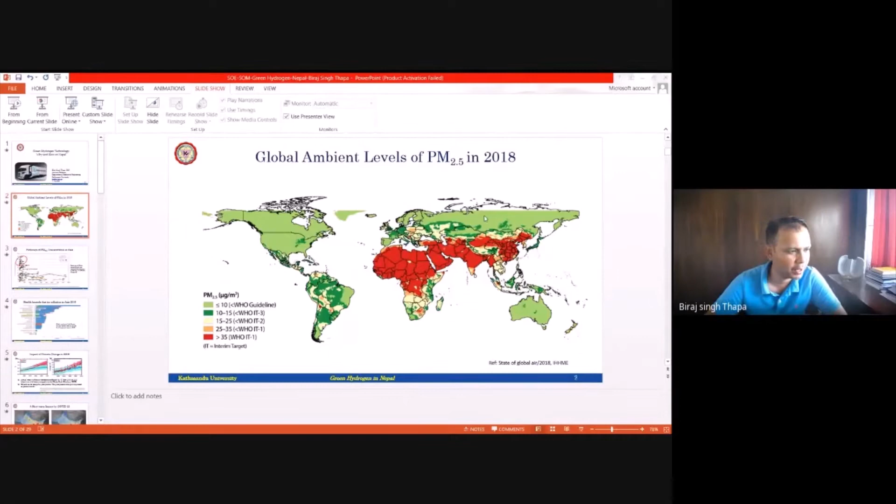So that's what we want to dream: to have fresh air, clean air. If not for us, the generation behind us—they should have green everywhere. That's why we see hydrogen as a future energy source, where we can see the entire globe green in this picture. That's a dream of my generation, to have everything in this picture green. That's why we call green hydrogen one of the sources.

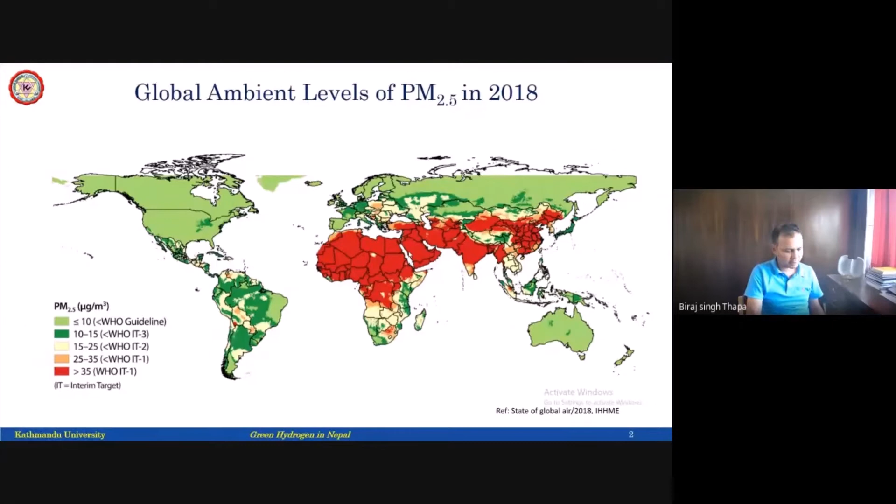And why we are having it like that—this is the background. Because today's discussion, the main aim for us is to have motivation. We need to understand some background, if not the technical one, at least the social part of it.

If you look at the picture, the GDP per person we have in Asia—Singapore, Brunei, Australia—they have quite a high GDP compared to South Asian countries: Bangladesh, Nepal, India, Pakistan. We are neighbors, good neighbors, and so many things are common. We have very low GDP, and we have very high particulate emissions.

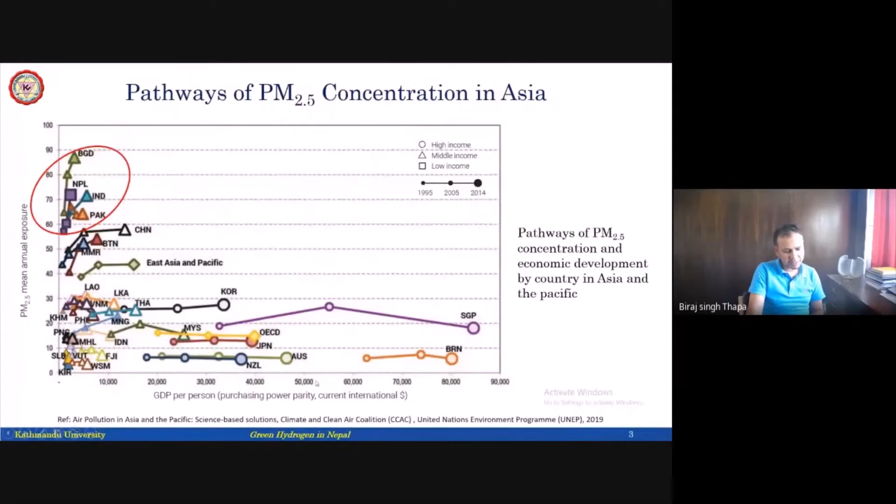So that is a really big challenge for our part of the world, and producing bad energy. We produce quite high emissions compared to the bigger or developed countries, and that is the reason we need to change the way we use energy, so that our GDP can rise and our emissions can fall down.

If you see the trends of global warming from the studies done, we may expect almost a 6-degree rise in temperature in the Himalayan region. If a 6-degree temperature rise happens in the Himalayas, we will not have a single drop of snow on our caps, and that will stop all our rivers flowing, and that will stop our entire ecosystem.

Of course, it will not happen—there has been a lot of movements, a lot of political science and other initiatives that will not let this happen. But still, if nothing is done, there will be a 6-degree rise in temperature, just because of greenhouse gases and other effects that human beings are producing, particularly through the use of fossil fuels.

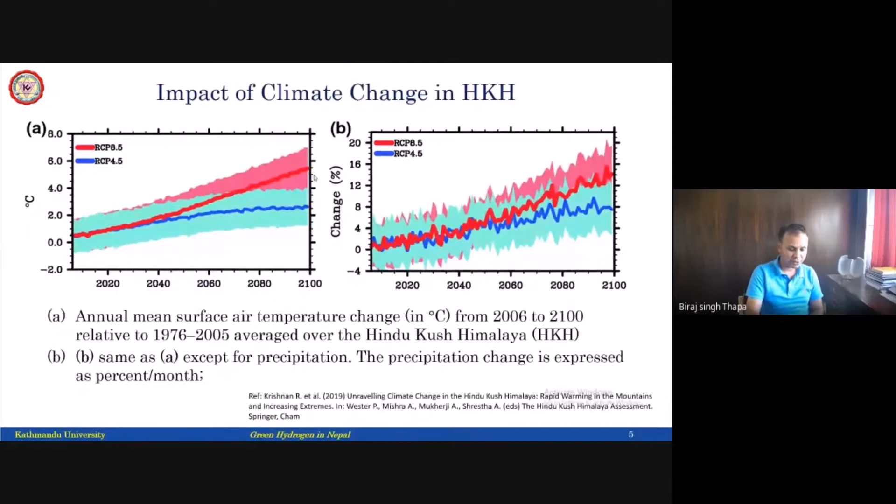But we have some scenarios—this is a very short-term study done by NASA. If you look from March to April into 2019, exactly the same period, this is the emission levels, the molecular matter above the Indian subcontinent. And if you look, just because of COVID, none of the vehicles were out. We can see within the same period, within one month's time, it has significantly declined.

Of course, we see some pockets because we have coal-fired electricity generating plants in this area, so that is still producing electricity. But if you see Delhi, if you see Dhaka, if you see Lahore, everything is close towards blue or green. That means if you can control greenhouse gas emissions, if you can control particulate emissions, that will certainly improve the environment. And COVID has given a very strong background—a very strong correlation between things.

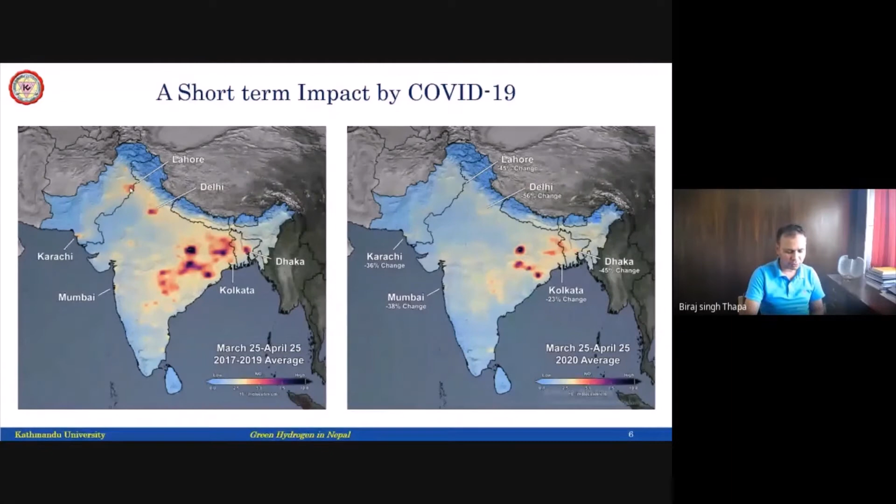So then, on that background, so many clean air measures in Asia have been proposed, released from UNEP, the United Nations Environment Program, for us. And if you see, these are the recommendations to clean our air, to control our environment. And there are so many things.

Clean cooking, of course Nepal is working on that. Industrial processes—most of the emissions are from post-combustion controls, for example the brick chimneys and other combustion things. And particularly if you see the emission standards for road vehicles, that means if we control the emissions coming from road vehicles, that will have a very, very high impact.

And that is possible. In Nepal, as of now, we can count the number of electric vehicles, that is 5 or 10, less than 50 on the roads. So if we change these patterns, the way we use the road vehicles and produce emissions, that could have a very big impact on the environment, and of course reflects on climate change and other things.

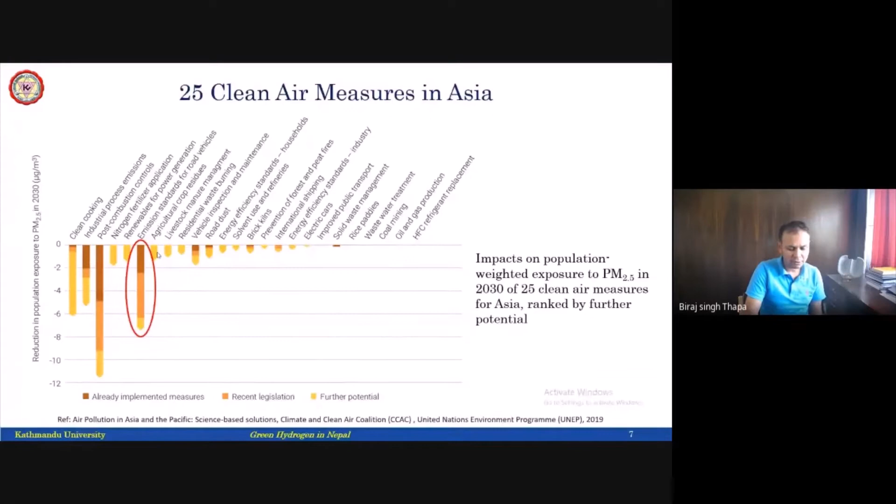Studies have shown, if we follow clean environmental measures, under the current scenario the policies that countries are following in this region will produce certain emission patterns by 2030. But if clean environment measures are legislated, the difference is quite high. The study shows 80% of emissions can be controlled, and most of them come from electricity produced from coal firing plants and emissions from road vehicles.

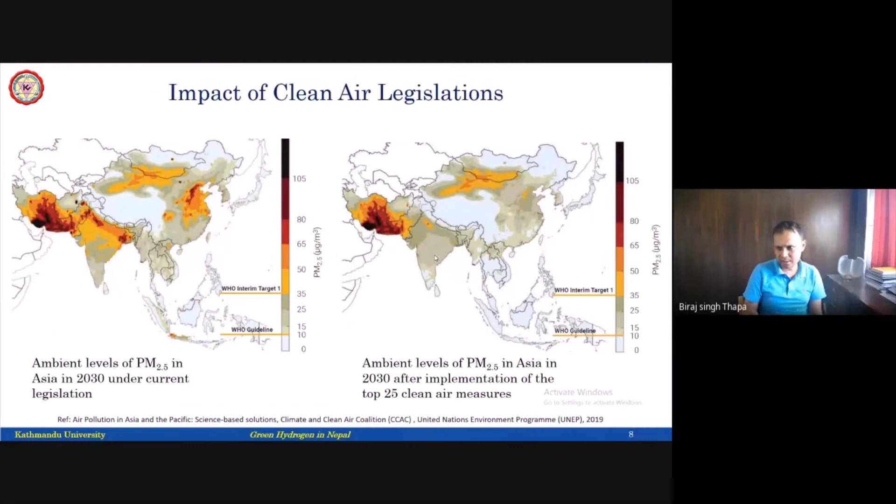So that has given us a kind of motivation that we need to change the ways we use energy. We need to change the way we use fossil fuels.

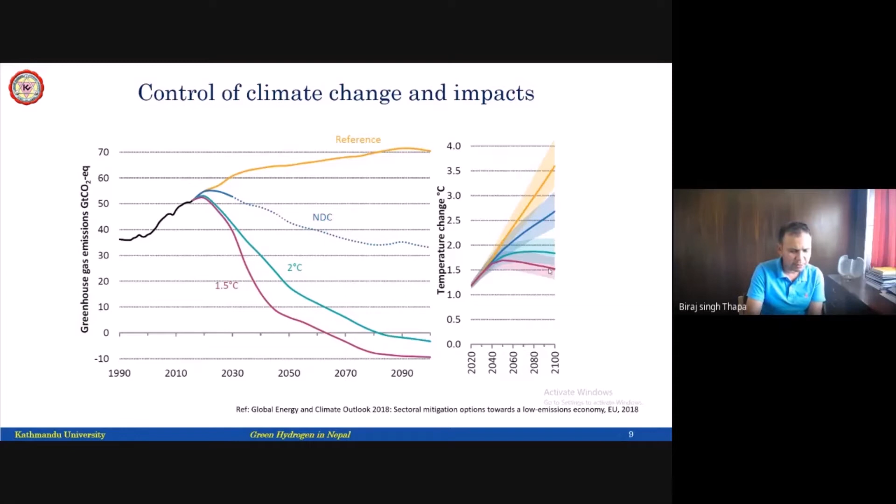There are also pathways to keep global warming below 1.5 degrees Celsius. And all these patterns of climate change, or control over climate change, have been related to the energy patterns that we use. So many studies have been done.

It is needed. It is necessary. It forecasts that if COVID does not impact it, the GDP is expected to rise quite sharply. And that means the purchasing capacity of each human being will increase. That means the amount of money we can use for purchasing energy could be higher than what we use right now. And that additional money for purchasing high quality energy for protecting the environment is possible because GDP is rising up.

If you can buy high value clothes, we can buy high value fuels as well. And there have been studies to see how this can be achieved. If we want to control temperatures below 2 degrees Celsius by 2100, this would be the energy mix. It's clear.

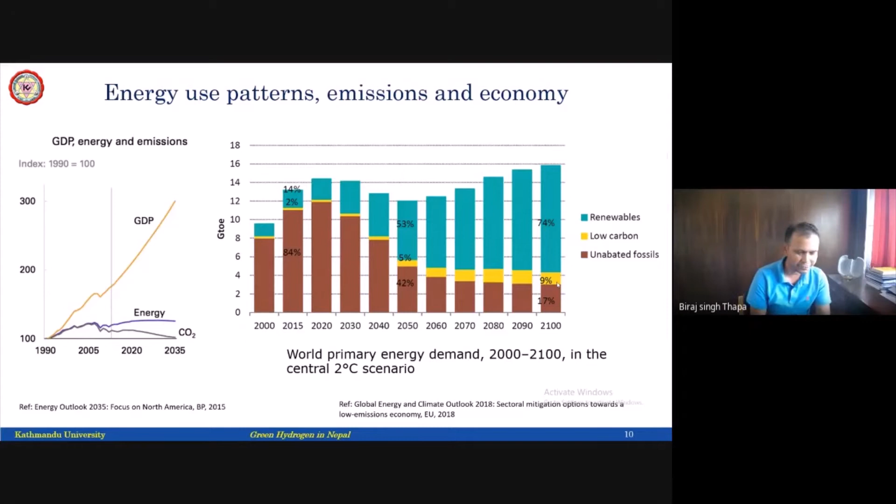And that's why we say green hydrogen can take up a big share of these renewables. So let me enter the second part: where do we find green hydrogen, and how is it contributing towards a low carbon society?

Hydrogen is an energy carrier. In fact, this process was found by the William Grove in 1838. It's quite an old technology. It's not rocket science at all. It's a very, very old and forgotten technology.

What we do is we just break water into hydrogen and oxygen ions by applying electricity. That's half of the reaction, what we call electrolysis. And we carry the hydrogen and put it back into the fuel cell, where it mixes with oxygen and produces water back. So it's just like breaking water into hydrogen and producing water by combining with oxygen.

So breaking water needs electricity, and producing water will produce electricity. So hydrogen is basically storing electrical energy in quite a dense form. This is just a chemical reaction. It's all behind the chemical reaction.

But the challenges are, how do we produce it in an efficient way? How do we store it in an efficient way? That has been our recent challenge, but it's an old technology.

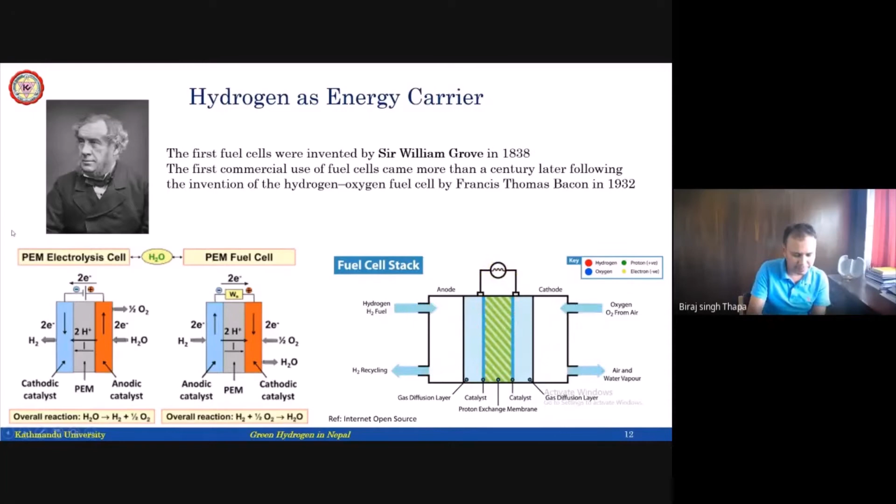As of now, it's of course solar energy that produces hydrogen. It can be directly produced from heat by thermolysis of hydrogen, and mostly from mechanical energy by heat, or directly from fluid energy by hydraulic machines. We produce electricity, and electricity can be produced from solar panels, and we do electrolysis.

We can produce hydrogen. Hydrogen can be produced from biomass, then by pyrolysis and other methods, and hydrogen can be produced. It can also be produced from photolysis, and there are several pathways. I think for Nepal, hydrogen production through electricity, maybe from solar or from hydropower, can be a sustainable path.

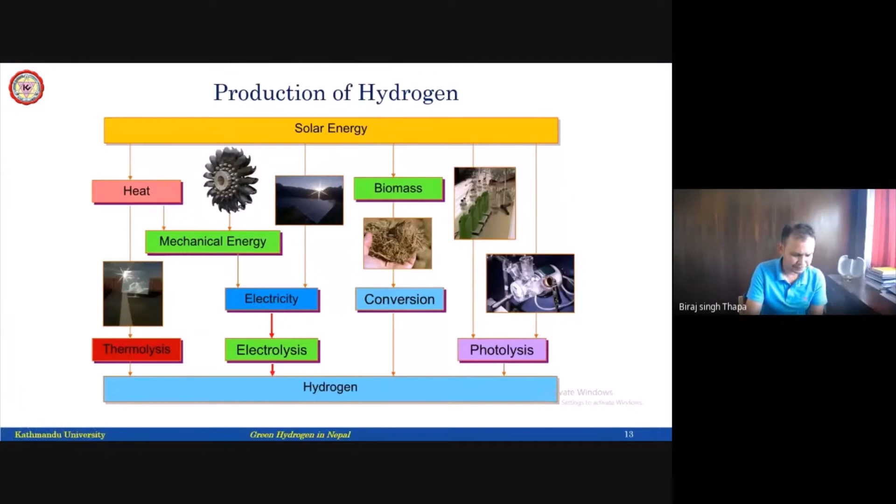There are a lot of technical aspects, though it has been developed a long time ago. This is a kind of block diagram. I don't want to bring you into the technical aspects, but there are so many steps.

We need to produce electricity first. Then we need to break water into hydrogen and oxygen. We need to store it, transfer it, and put it back again into the fuel cells to produce electricity again. So that's a very complicated process, which has overall efficiency issues.

The total average efficiency for the whole cycle is not more than 60%. There is so much research being conducted, and the aim is to cross 80% efficiency. But the argument is, if fossil fuel can run with 30% efficiency, why can't hydrogen run with 60% efficiency?

Storage is another problem. We need 300 bars, an extremely high pressure, not a common pressure. So that's a challenge, how to store it at that high pressure. It's very light, it leaks, it is inflammable. We have safety issues, a lot of cost parameters around it, and the technology is not completely mature. It's under process, and the main problem is adaptability.

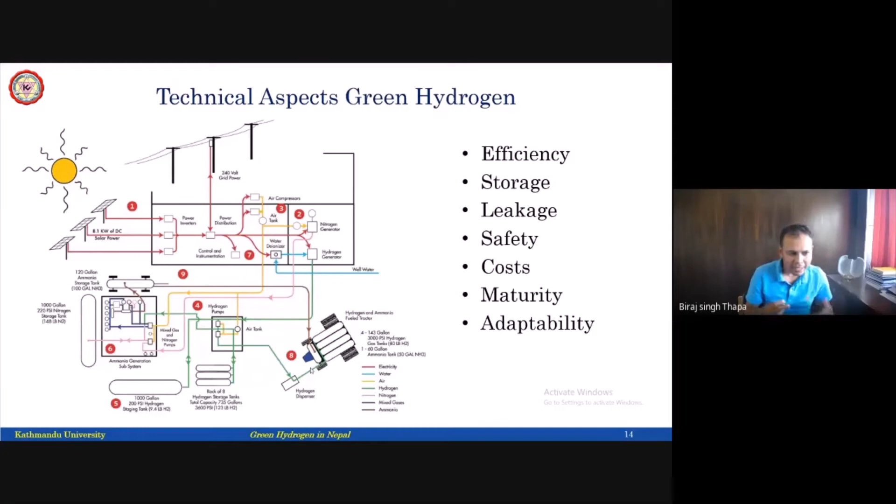Can we change our mindset from fossil fuels, which we call dirty but easy fuel, to a clean, complicated, and challenging fuel? Maybe that's how the maturity of society and the adaptability of this technology come hand in hand in future. That's what we can expect.

That's huge when we compare it to vehicles, because carrying a battery means consuming more power. That's why we think in the future, small cars and vehicles will still be battery-based electric vehicles. But for big buses, intercity cars, and trains, where the battery cannot drive it because of the low energy density, there is a distinct gap where hydrogen can fuel it because of this high energy density.

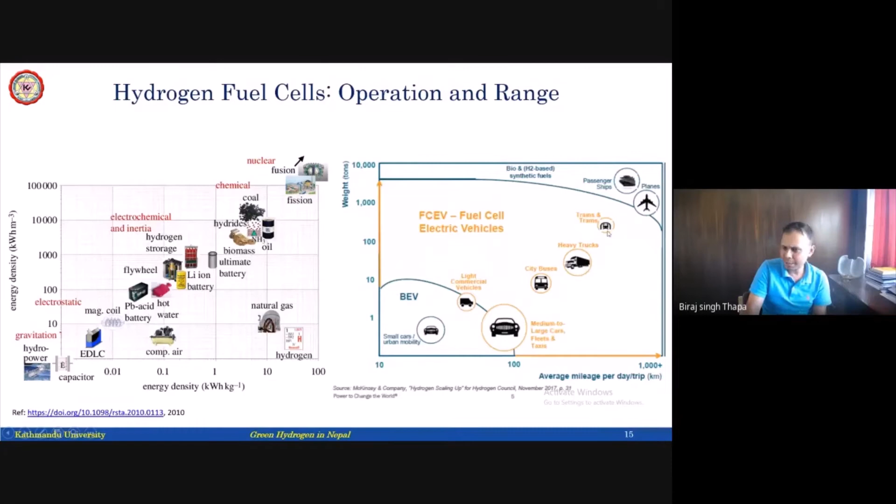We just need a few kilograms, 10 or 20 kilograms of hydrogen, to drive from Kathmandu to, for example, Pokhara. That's quite high energy density. So that is the range where lots of research has been conducted, and that is where we can also focus in Nepal. A lot of energy is consumed by city buses, trucks, and maybe in the future, trains as well. If you see the market right now in 2020, we have a very classical market for hydrogen.

It's just a feedstock. That means industries producing fertilizers, industries producing some chemicals, something only that. So only small scale or industrial scale hydrogen is in demand for this, but it is changing. Lots of new industrial sectors are coming up.

For example, power generation. Transportation will be the largest consumer of hydrogen. Right now it's almost zero, but in the future, transportation will have a very big sector of hydrogen. We also have industrial energy coming from hydrogen, and building energy coming from hydrogen. Almost the industrial scale, that is urea production and chemical processing plants, remains the same.

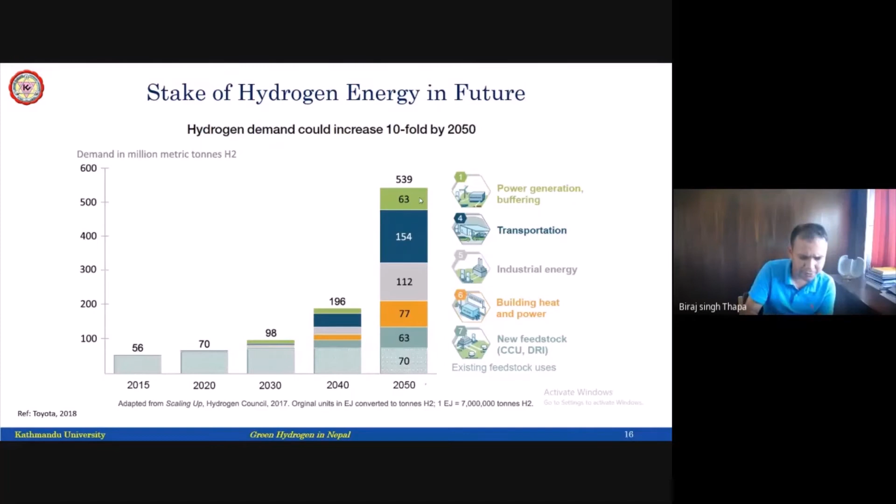So a lot of new things will happen. And if we start to bring hydrogen into the context of Nepal as well, all these things will start in Nepal too. We will have a new ecosystem of transportation, a new ecosystem for power generation and buffering. So that's the future. The entire world is moving towards hydrogen with a different shift of society.

And this year is very significant for hydrogen. We call 2020 the horizon, because from this year, the cost of hydrogen from renewables is entering the cost range of hydrogen produced from fossil fuels. Until now, the cheapest hydrogen produced from renewable energy was still more expensive than hydrogen from fossil fuels.

From 2020 and 21, the cost will start to come down and slowly even fall further. By year 2040, hydrogen produced from renewable energy will be cheaper than fossil fuels. And that is why we need a 10 or 20 year gap.

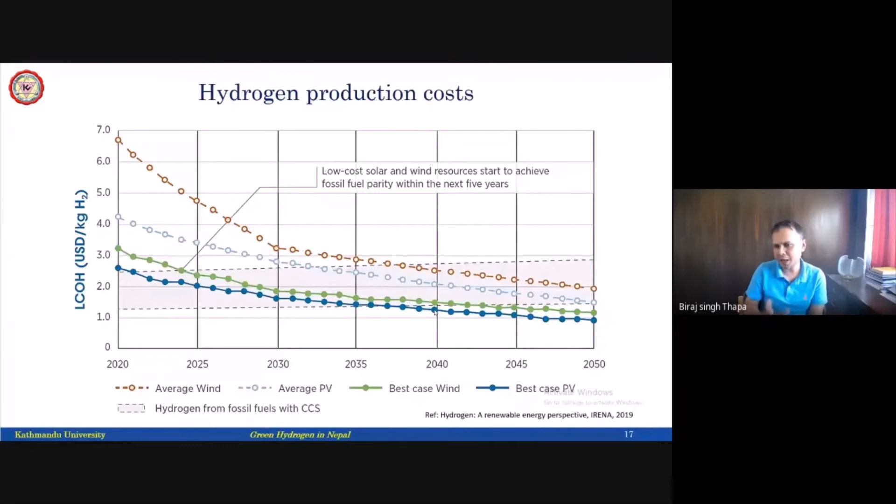We still have some time to prepare our society, because hydropower will remain for the next 200 years, for example. So if hydrogen becomes comparable and cheaper than fossil fuels, this will definitely change the transportation sector and the industrial sector. We need to start preparing now in order to adopt this energy in future. That's why we say this is the right time to discuss, the right time to start.

If you look at the development of hydropower in Nepal, the story has changed within the last 5 years, where we used to have 18 years of load shedding. Now we have surplus energy, and moreover 24,000 megawatts are under some stages of development, and almost 7,000 megawatts are in the pipeline. We expect these projects to be completed by 2030, if late 2035.

So if the National Grid has more than 7,000 megawatts in 2030, we will have lots of energy surplus. There are many discussions on how to handle the surplus energy, but it's good that we have it. That is the motivation.

The recent data from the Investment Board shows that by the year 2030, the maximum power demand, including all the new energy sources, converting all households into electric cooking systems, converting 30% of vehicles into electric vehicles, and all government measures to create demand, will saturate only 10,000 megawatts. But the power production, if we go in high-speed mode, will be 18 gigawatts.

So we can clearly see the projections. These studies show we will be having 8 gigawatts of surplus energy by the year 2030 than what we need, and that's what we want to utilize. It will be too late if you start thinking to utilize this energy in 2028, for example. We need to start thinking from now how to do that.

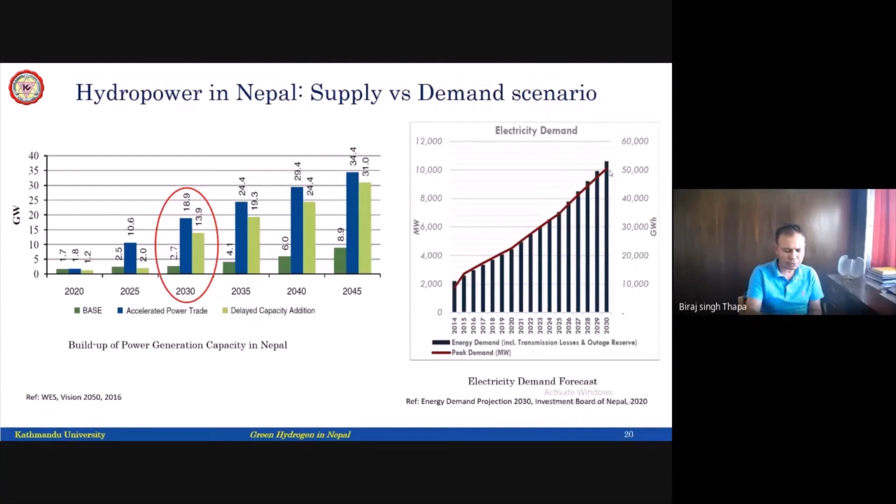And of course, the best example given is to export. There are so many things—MCC is in the parliament, and there are good numbers. It says we can have 3 billion USD per year in 2030 if we are able to sell all the surplus electricity to India, for example.

But there are so many issues. What happens if transmission lines are not there? What happens if you don't have quality and reliability in power? What happens when the transmission lines fail? What happens if political issues rise up? What happens when the money to do land acquisitions is not available? So many uncertainties, but still hope is there that Nepal can export electricity, surplus power, and produce revenues.

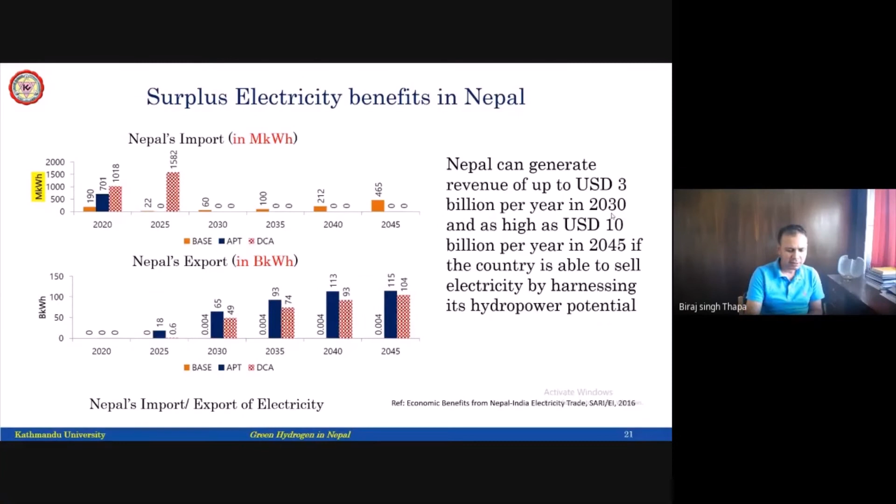That's one good way of thinking, but there are other ways to do that. And what happens when we start to export electricity to India?

There is another study that says right now petroleum product consumption is quite low. But once we start to generate revenues by selling electricity from 2030, $3 billion per year, there is a boom. Look at the rise in petroleum products—that is not sustainable development. We sell electricity and we buy fossil fuels, and it is exponential growth.

Why? Because we will be importing lots of vehicles, lots of cars, lots of roads that go to wide corners of Nepal, and we need more fossil fuels to drive those cars and vehicles. More imports from India, and we have trucks that drive imported items from Calcutta port to Kathmandu and the rest of the world. So that means, becoming rich in future, Nepal will have even higher dependency on fossil fuels.

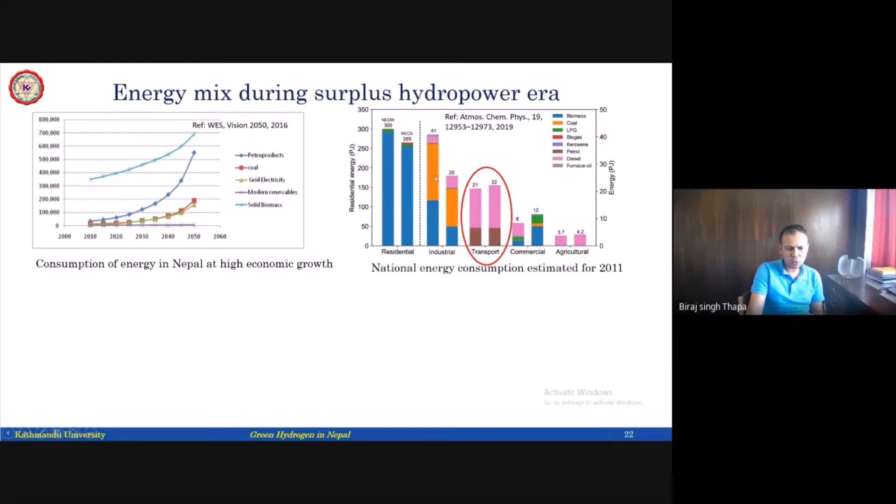If you look at the transport sector, it's diesel. So we will be having high diesel consumption in future, and also coal. If you look at the energy consumption pattern for 2030, we will be having 7% diesel, and when we become rich, we will be having 18% diesel.

Of course, electricity will be changing from 3% to 32% because cooking stoves and electric vehicles will be there. But it's quite disappointing to have almost 3 times growth of diesel, from 7% to 18%, from poor Nepal to rich Nepal. So we find diesel is a commodity that cannot be replaced. We can replace petrol with electric, battery-based vehicles, but diesel has a bad carbon footprint in Nepal.

If you don't do anything right now, this will not let us be in sustainable development, because we need to depend on other countries for 18% of total energy we consume, coming from diesel alone.

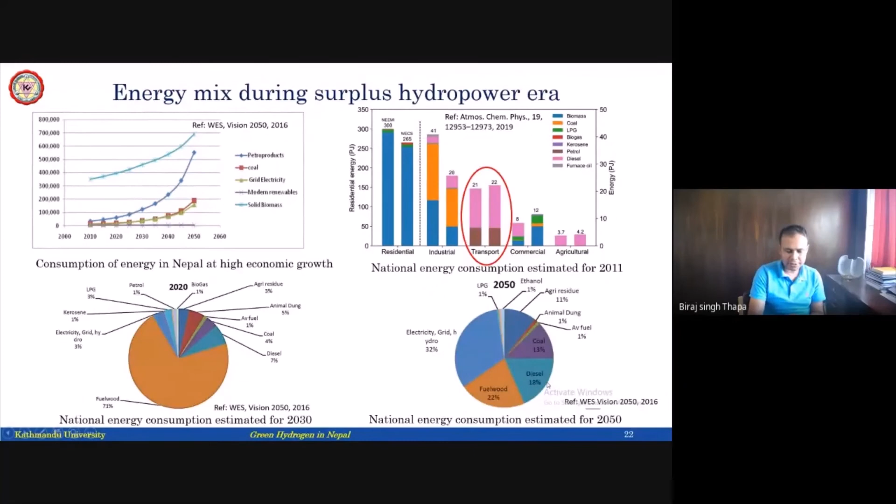So if you look to the other side, the small projects, the 5 megawatt and 10 megawatt projects, they are not able to lift power to the grid because they cannot synchronize, since the electricity at 11 kV is not supporting their systems. Then they are called sick projects.

So if all the small 1 megawatt to 5 megawatt projects are classified as sick projects, and they are not giving revenues, their share is getting down to 50, while the big project has to give 10 gigawatt hours of electricity free to NEA, then that's not a very good story for the hydropower investors.

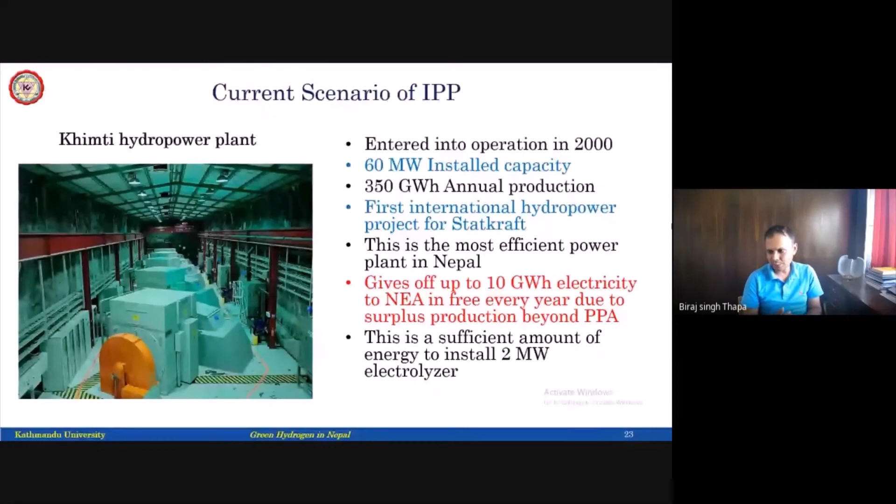And there is one issue. If we start to produce hydrogen from the excess energy, from the sick projects, I think that will be a sustainable method, and that is what we call the future directions.

This was from yesterday's news in Setopati. I'm thankful to Professor Gola who shared this with me. Already it's happening - people are quite innovative in Nepal. We have a very good business mind.

So the biogas produced from municipal waste and other wastes is being converted into gas and bottled in cylinders like this, and it has commercial value. If entrepreneurs in Nepal can establish a commercial biogas center where they compete with LPG, this can become an alternative to LPG fuels.

Maybe in future, the same companies can divert their businesses and produce hydrogen from hydropower surplus energy. Even Khimti is giving 10 gigawatt hours free to NEA. Small power projects cannot be grid connected, and their electricity is almost free for now.

So if we can use that electricity and produce hydrogen, bottle it like this, and sell it in the market, maybe fossil fuel trucks can be converted into fuel cell trucks in future. We know that even Tata Motors have started investigating hydrogen trucks.

I don't want, in future, Tata trucks coming to Nepal from India with hydrogen pipelines for the fuel cells. So before that happens, we need to at least try to create our own fuel that can replace fossil fuel in the future.

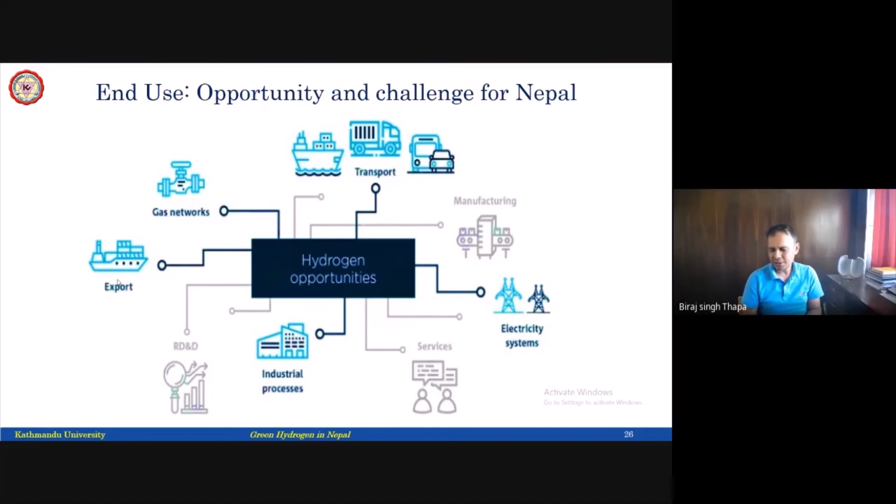So concluding this, as I said, this is just some technical part. We think this should be a roadmap. We should start from the feasibility study, with assessment of technical, financial, environmental, and market aspects. Market is more important for us, that's why School of Management is our partner today to find out what can be done. The presentation after me can be on these issues.

So hydropower and other renewables. We need to start from somewhere: feasibility study, cost benefit analysis, social impact, environmental impacts, all of that. We need capacity development.

I think at present, me, Bhola sir, and a few of us know what we are talking about. We are trying to motivate others, reach far and wide, push people to make them understand. But that will not help. We need capacity, we need research facilities.

We need expertise in the local universities so we can do research and development and contribute to knowledge management. Of course, we are not ready to do fundamental research, but technology transfer and local adaptation, that is our path. And to support that path, there should be capacity in the university coming to society.

Then we think we need a pilot project, small or big, it doesn't matter, but that will complete all the steps from production to bottling, safety, transfer, retailing—all those smaller things—and create a complete business ecosystem, because this is a new commodity.